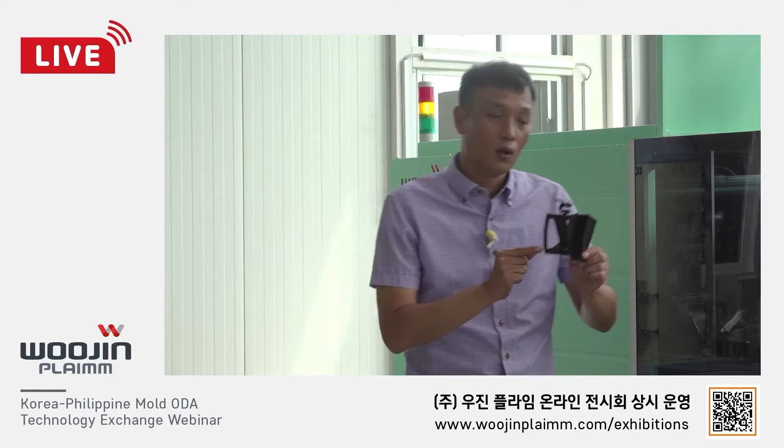So as I just explained, if we insert the resin with the same screw speed, by each surface we will have a different speed.

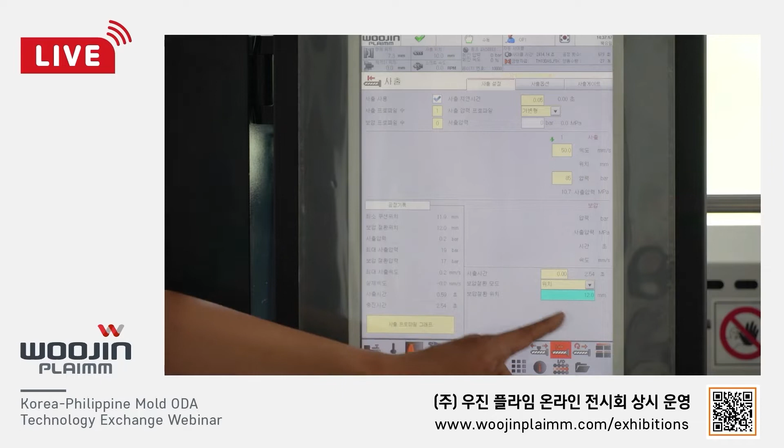And for the holding pressure switchover location, where it switches from filling, I applied 12 mm. So this 12 mm comes from the multiplication of the diameter of the screw, which is multiplying 0.2 to the diameter of the screw.

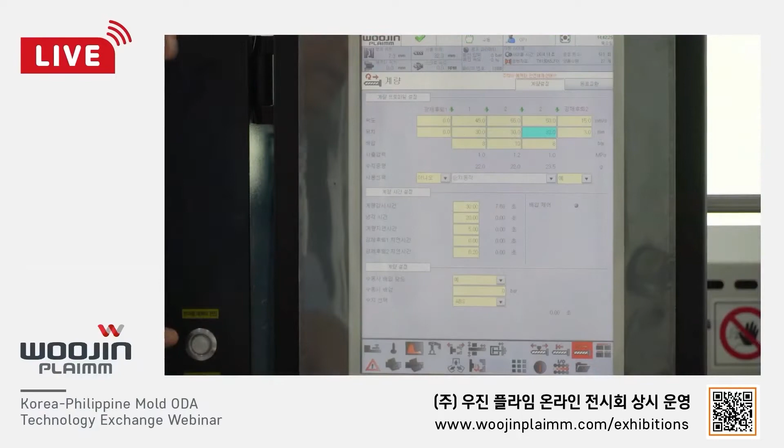So I just entered all the figures here for after doing the measurement, and I'll produce and mold the product.

So I'd like to give you the information about the injection molding condition that I just set.

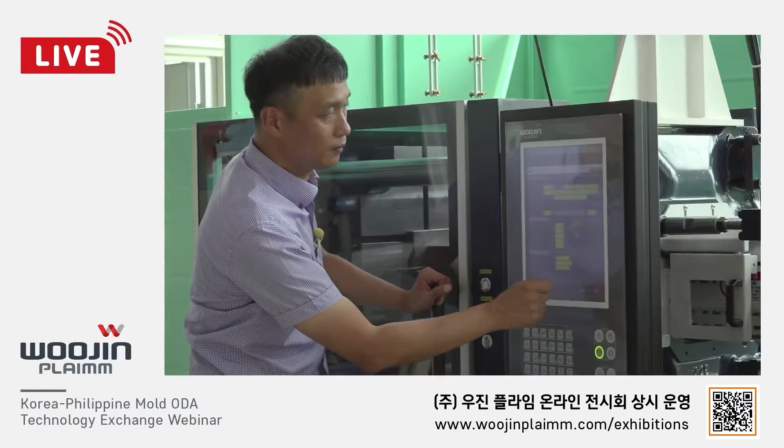So this is the initial product that we can have with the settings, and by investigating this product, you can increase the amount little by little.

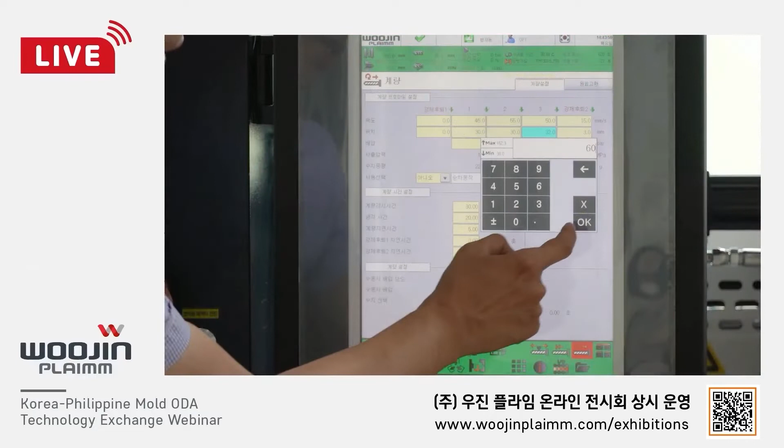So as you can see with the product, the molded amount was quite insufficient. So we decided to increase the amount up to 60 millimeter.

So we just moved the screw from 60 to 12, which means that we inserted about 48 mm resin inside the mold.

So as you can see from my demonstration, you have to check the product that has been molded through this injector, and by increasing or adjusting the amount, you can get the fixed setting value.

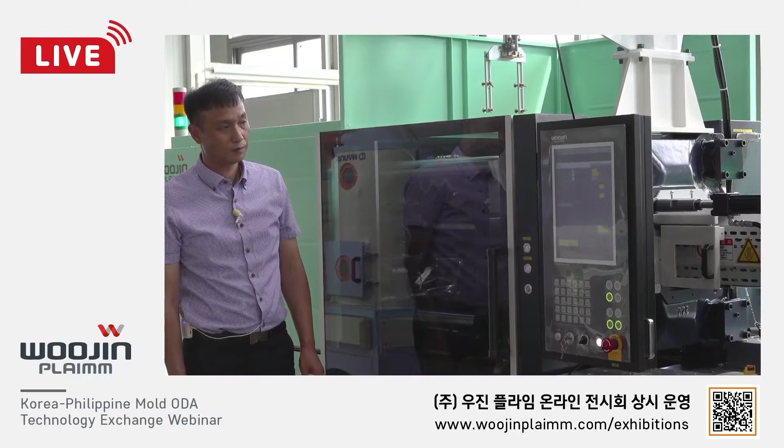Although I reduced the amount by 3 mm, we still had a complete molding, which means we over-measured the amount for the previous product. So I was trying to repeat this process in order to get a poor molding.

Here, when I reduced it by 2 mm again, the molding is not complete. This means that 15 mm, the figure we found in between, was quite close to the exact amount required for molding.

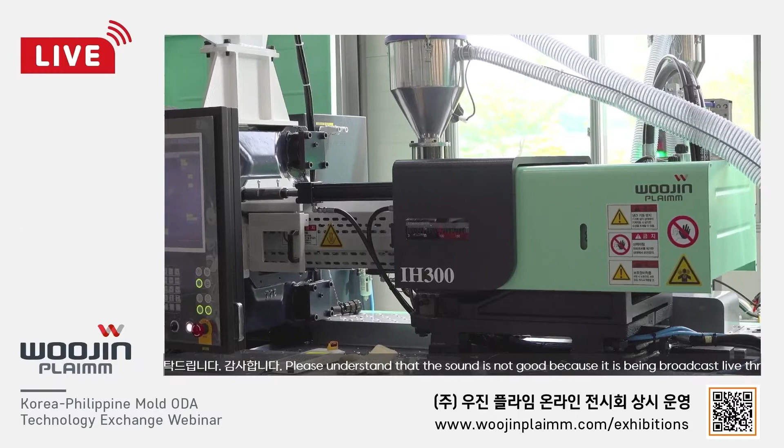When I checked the product, it was not solid enough, so I increased the cooling time by 5 seconds.

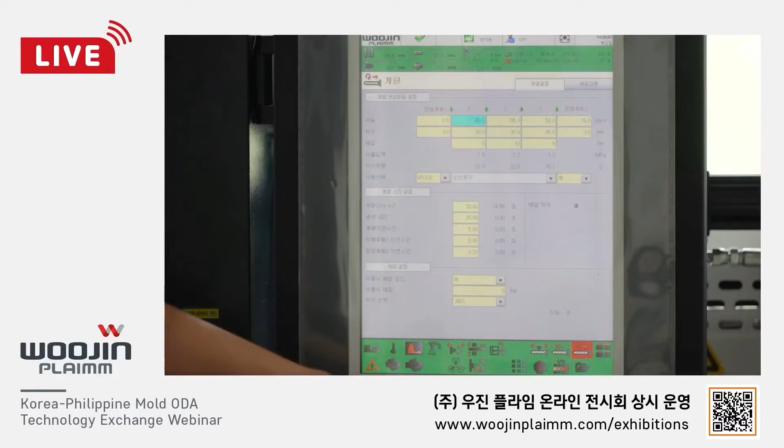Now let's check the conditions for this product: the speed was 50 mm/s, and I inserted resin from 95 millimeter down to 15 millimeter. For that, the resulting injection pressure was only 46 bar.

So there's a gap between the setting pressure and the actual pressure. The actual pressure was lower, at 46 bar, but this is normal, because the setting pressure is just the limit value we allow the machine to use. The actual pressure should come out lower than this setting, which is totally normal.

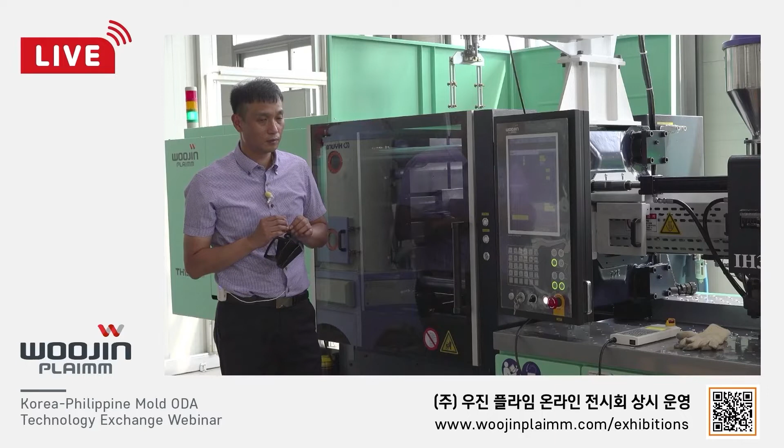If we get an incomplete molding while the setting pressure and actual pressure come out the same, it means the molding needs more pressure, so you have to increase the setting pressure.

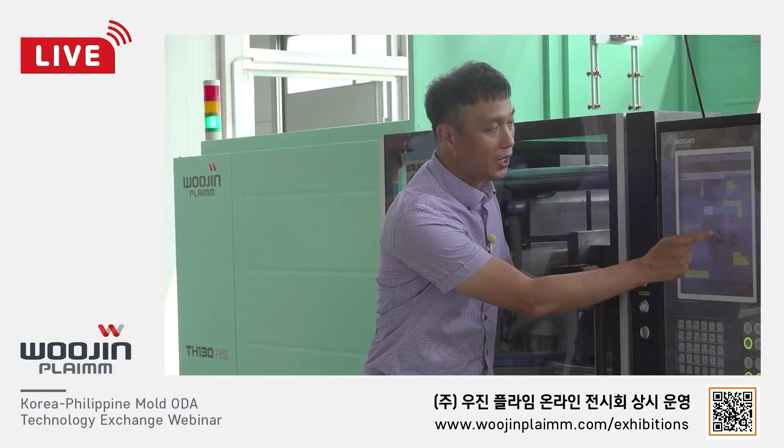After that, it's good to set the final molding speed relatively low in order to prevent gas or carbonization defects.

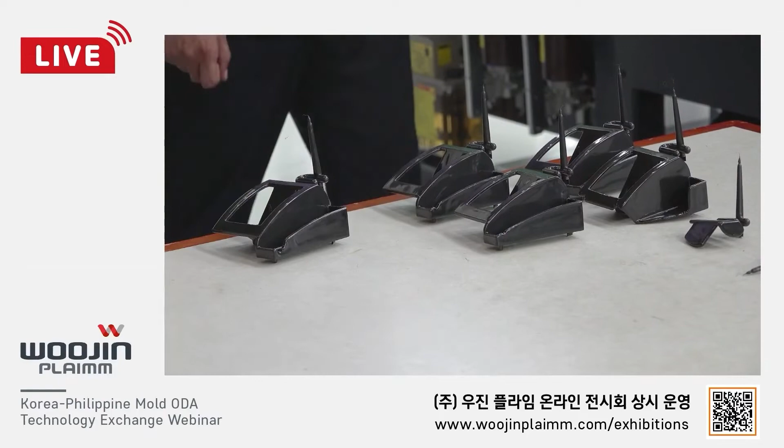Since the molded amount changes with the speed, you need to find the exact correct amount that matches each speed.

Here we can see that the molding is now complete.

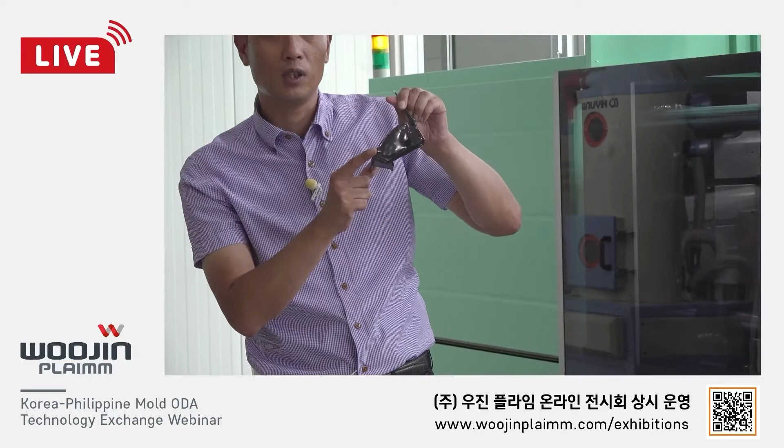If during production a defect occurs at this location, we can resolve it by changing the speed for stage 3. And if a defect occurs in the last molding section, we can solve this trouble by controlling the speed for stage 4.

So first, you need to find the location of each defect or molding section, and then find the proper speed for each of those sections and locations.

If trouble caused by speed occurs in a certain section, you need to first find that location, and in order to control the speed for that section, multi-stage injection is necessary.

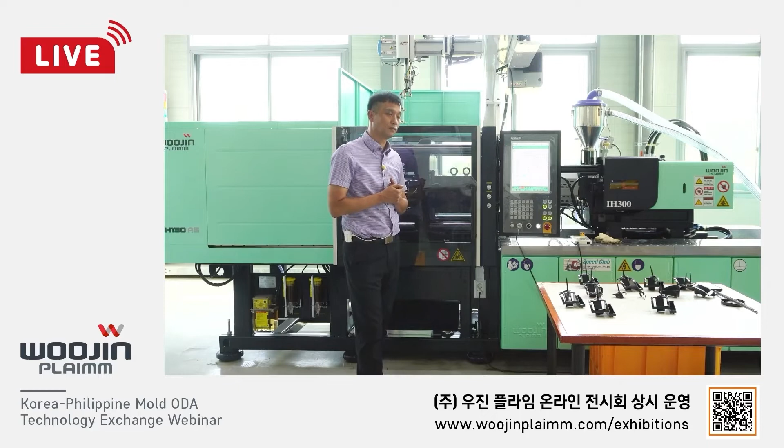Because when the resin is completely filled inside the mold, if the speed is still high, there's a tendency that the resin wants to go out. So in order to prevent that, we can lower the speed at the last stage.

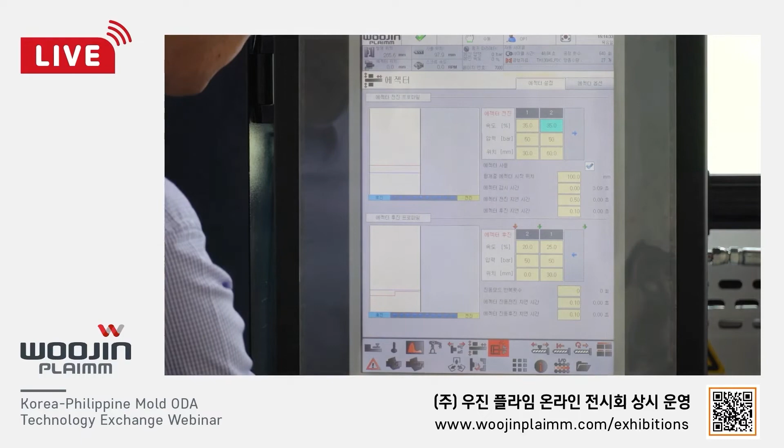Here, as you can see, with the additional filling of the resin, we could solve the contraction issue.

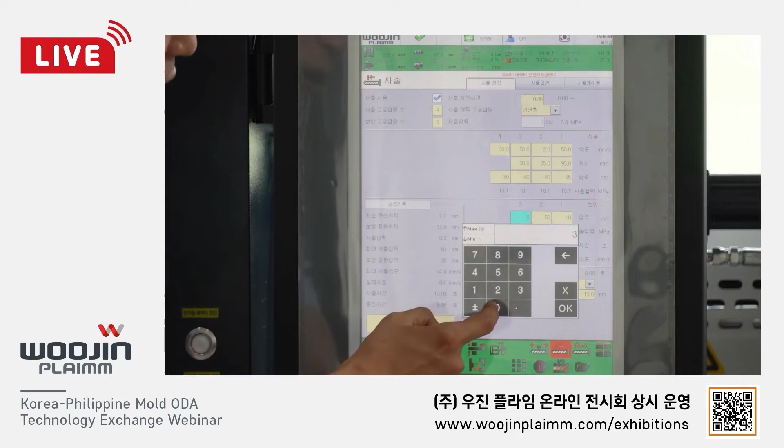So as you can see, I just applied the level 3 of suppression, with low pressure on stage 1. And for the pressure, I applied 50 for stage 2 and 30 for stage 3. And you can see its result.

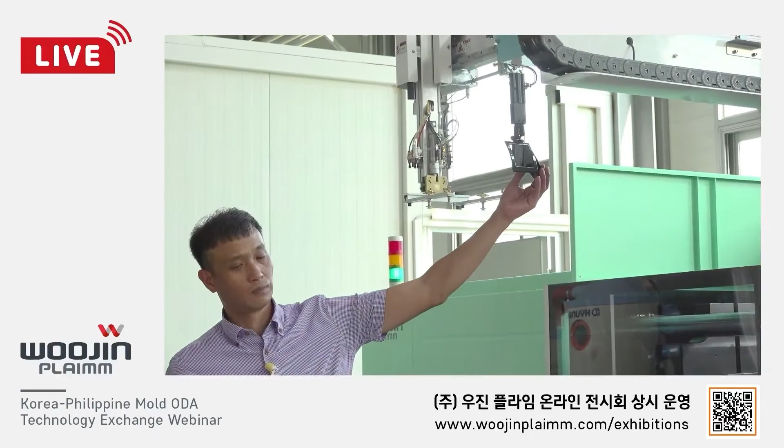So you can see we have a smaller burr, although we use the same pressure of suppression.

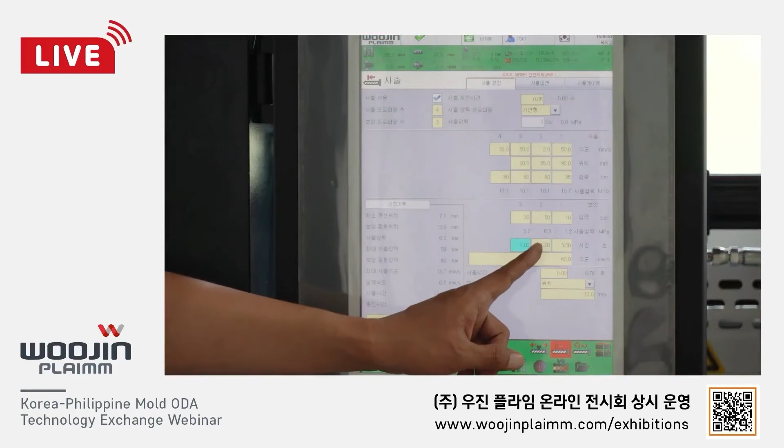And if the surface becomes solid enough, when we are at the high pressure for stage 2, it can also be a kind of barrier to prevent resin from going out of the mold.

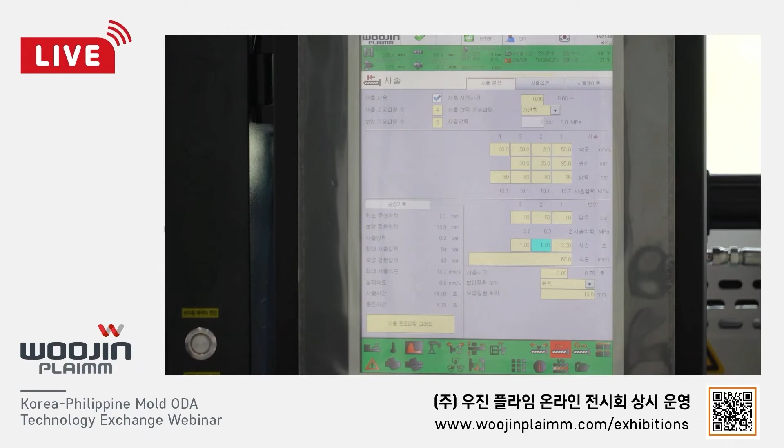So by applying multi-stage injection, we can solve the problems or issues that can happen on the surface of the product by controlling the speed for each stage.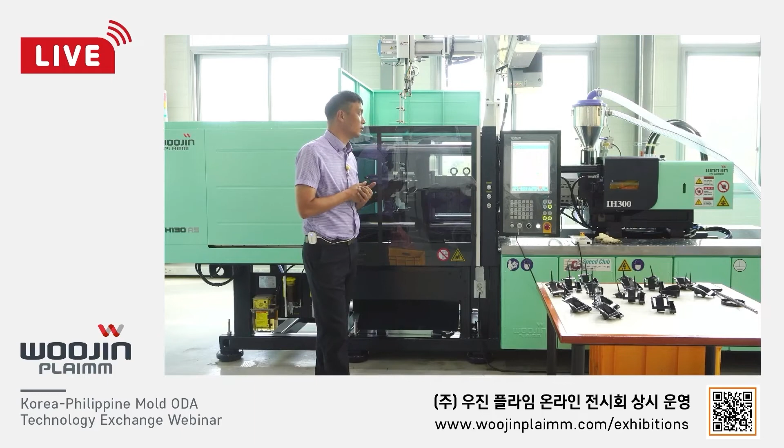And if you take the same approach, but still have the same defects or problems, it means that the defects or problems do not come from the conditions of the molding settings.

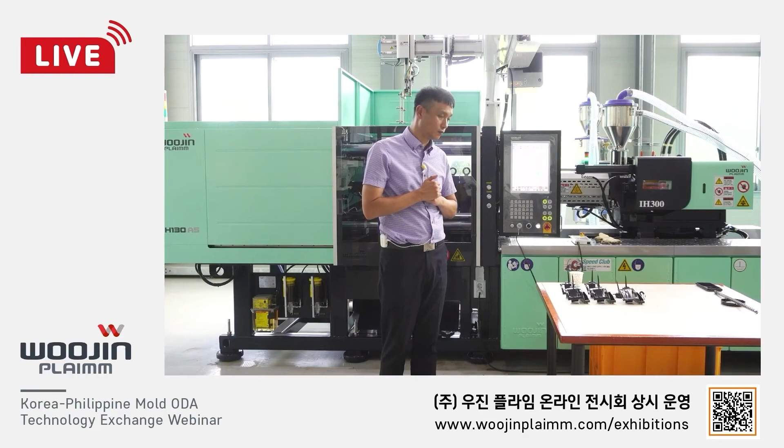Okay, ma'am. Ma'am Choi, follow-up question from PC Tong. What percentage of the product volume is optimal for the injection process?